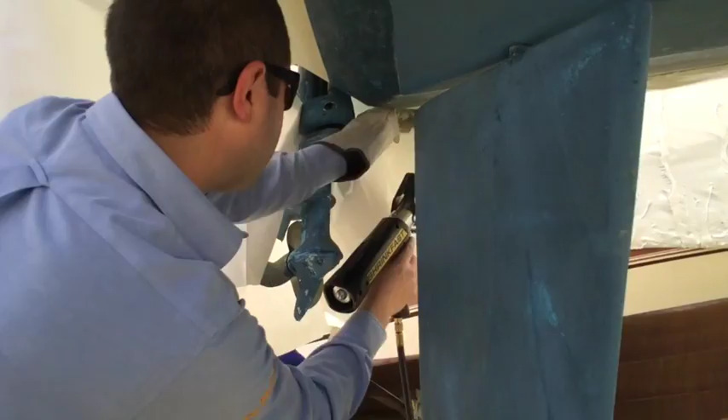Today, Dr. Shrink will be demonstrating how to successfully wrap a sailboat, mast up, for the winter storage season. The techniques used here can be applied when wrapping any single-masted sailboat.

We will begin with the strapping. The strapping will be secured to various locations on the sailboat to ensure proper pitch to shed unwanted snow during the winter storage season. Begin by securing the strapping to the mast and the forward pulpit.

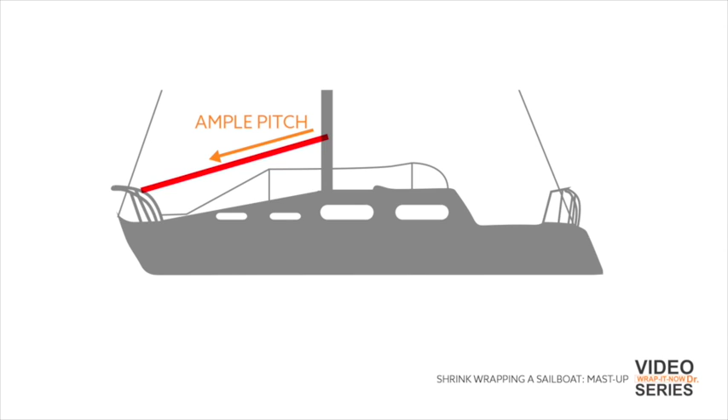We will start with the mast. When securing the strapping to the mast, ensure it is high enough to allow ample pitch to shed snow and ice. Tie your strap to the mast, leaving plenty of extra to secure to the forward pulpit strap. To secure the forward pulpit strap, we recommend making a V pattern with your strapping, securing to the strap on both port and starboard sides of the rail.

Your strapping from the mast and strapping from the pulpit will be connected using a buckle and strap tensioning tool.

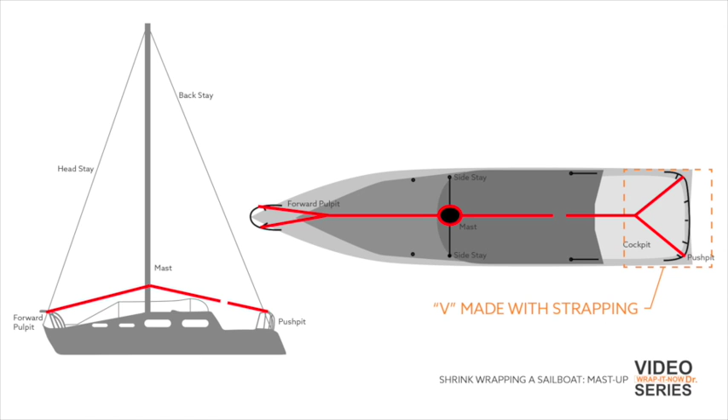The same concept applies to the strapping system for the pushpit rails. Secure a strap from the same location on the mast as you did to the forward section of the vessel, again leaving yourself plenty of strapping to connect to the pushpit strap. For the pushpit strapping, create a V pattern from the wide points on the starboard and port side of the pushpit rails and secure both straps together once again using a buckle and strap tensioning tool.

Here you will see the strap being tightened with a strap tensioning tool.

Just like the forward bow straps, knot off the excess strap and cut away any excess. At this time, you will also want to tape your buckles to ensure no hot spots or holes are created in your finished shrink wrap cover.

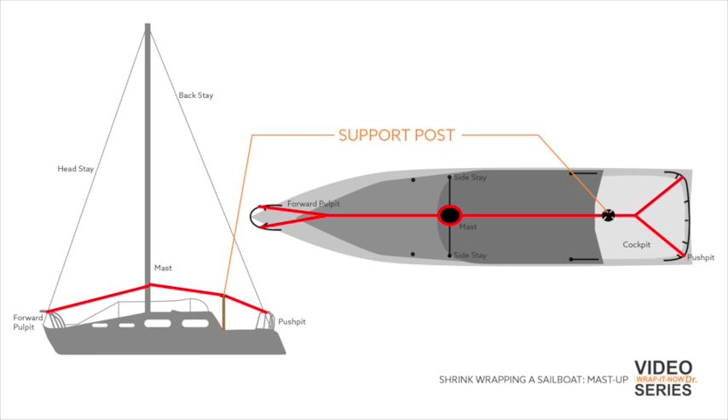For this application, we will also be installing a support post with end caps in the cockpit of the vessel for increased strapping stability. Measure your post like we have done here, and cut your 2x4 to size, and secure end caps to each end.

To ensure that your end cap is secure, run a line perpendicular from your existing strapping through the end cap around the hull of your vessel. Be sure to place your support post in the cockpit, so when wrapped around the hull, the strapping sits behind the keel.

Once this is completed, you will secure your strapping with a buckle and strap tensioning tool. Be sure to once again tape your buckle.

We will now move on to the perimeter band. To install a perimeter band, we will install straps from the cleats or rails with an open loop on the end. As you can see here, the loops will secure the perimeter band just above the waterline of the vessel.

You may secure your perimeter band as high or as low as you like, but if unsure, use the waterline as a guide, as this will ensure an even perimeter band around the entire vessel.

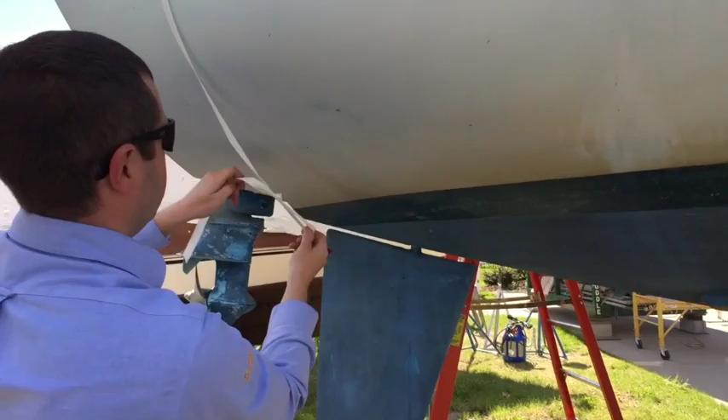Much like the installation of the perimeter band on other vessels, start at the rear and loop your band through each of the straps around the entire perimeter of your boat, ending at the stern.

Here you will use a buckle and a strap tensioning tool to secure your perimeter band. Be sure to use padding or protection against your hull when using the strap tensioning tool. Apply even tension to the strap to ensure that it is a snug fit against the hull. When you have tension in the strap, be sure to cut your excess strapping, tie off, and tape your buckle.

Now that your perimeter band is complete, your shrink wrap substructure is now finished. We will now measure for your shrink wrap cover.

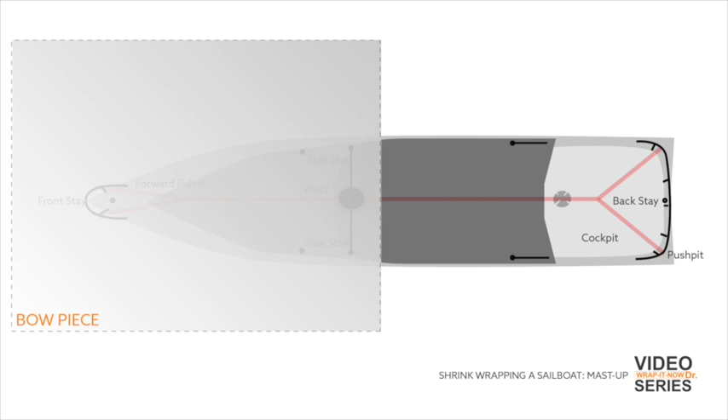We will have 2 sheets of film, one for the bow section to the mast, and one from the mast back to the stern. Here is how we will measure these sections.

For the bow section, we will first measure the length. We do this by measuring from the mast to the forward pulpit and down the bow to the perimeter band. We will add an additional 4 feet to this, 2 at the mast and 2 at the perimeter band, for additional film needed for our welds. This gives us our overall length.

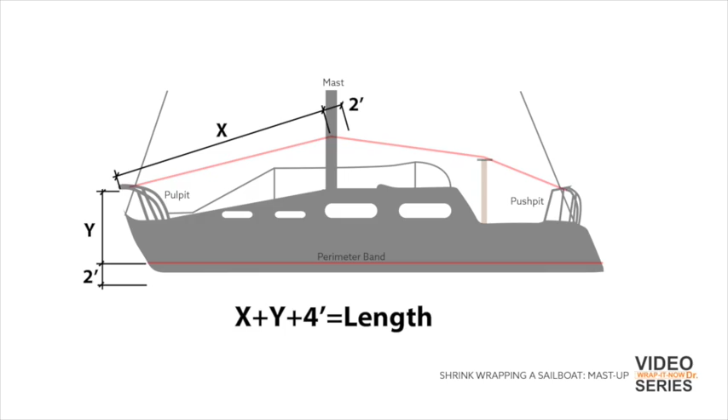We repeat this same concept for the stern film piece. For the length, we measure from the mast over the end cap to the pushpit rail. From here, we will measure down to the perimeter band and add 4 feet, 2 at the mast and 2 at the perimeter band, for additional film needed for our welds. This gives us our overall length.

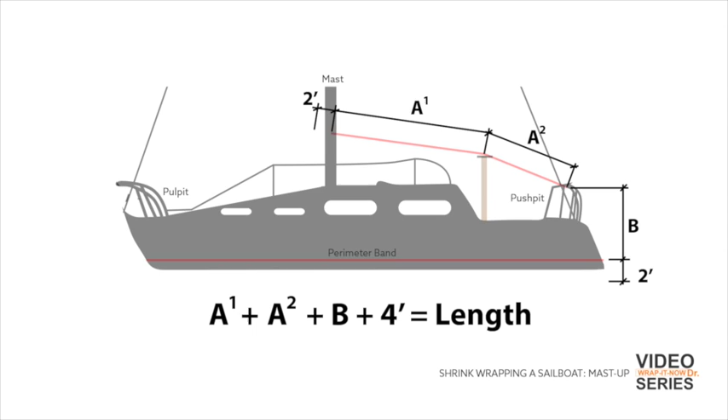We now need to measure for the width. We do this by measuring from the connection point of the strapping on the mast to the top of the lifeline, down to the perimeter band. We then add 1 foot to this measurement to ensure we have enough material for our weld. We double this for our overall width.

Now that we have the measurements of your film, we will cut the film to length. This will make it much easier to install from the elevated position of the vessel. Roll out your film in a clean and dry area to avoid debris on your film. Measure and cut with a film knife.

Once your 2 pieces have been cut, we will begin installing the film. We will begin by installing the bow piece. Unwrap your film from the deck of the vessel and find its center point. You will secure the film to the mast with tape. Be sure to leave about 2 feet of excess beyond the mast, which you will use for your weld piece

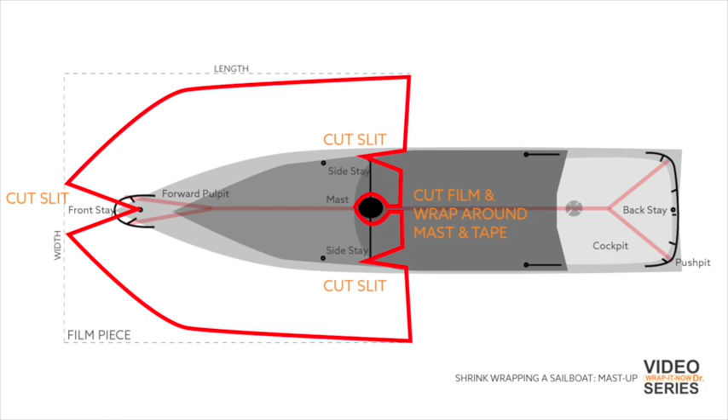to the stern. As you drape the bow, you will cut slits in the film around the front stay, side stays, and mast as illustrated here. You will do this to both port and starboard sides of the film. Once you have cut these slits and fitted the film centered over the bow, unfold the entire bow piece.

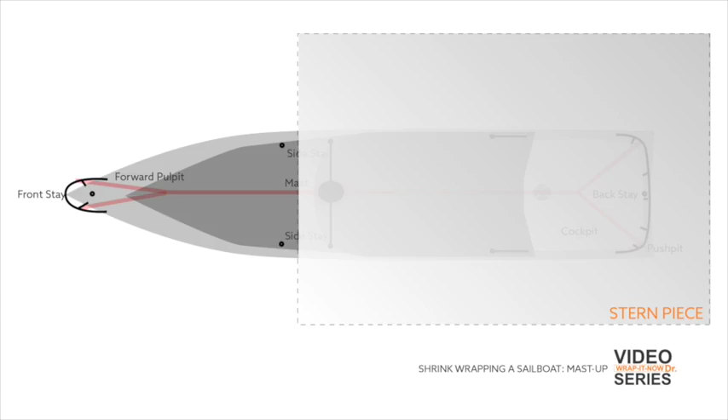You will now install the stern piece. Take your film onto the deck of the vessel, and much like the bow piece, find the center point. You will cut slits in the film around the back stay, side stays, and mast as illustrated here. Be sure to once again leave about 2 feet of excess for your weld to the bow piece.

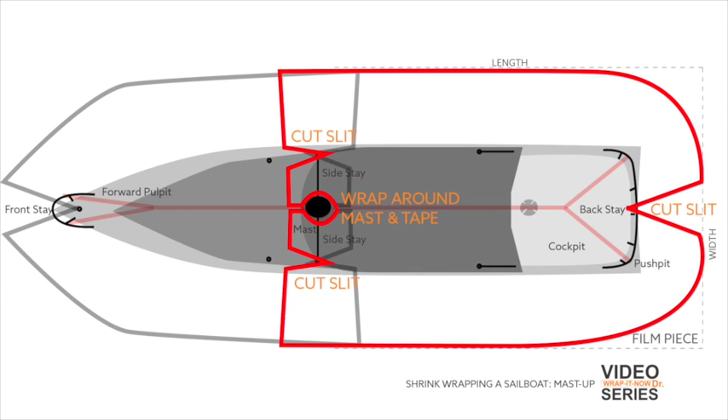Once you have found the center and taped your bow and stern pieces, you must weld the film around the mast, between the mast and the side stays, on both port and starboard sides of the boat, as this area will not be accessible once the entire vessel has been draped. You can see in this diagram the area to be welded before getting off deck.

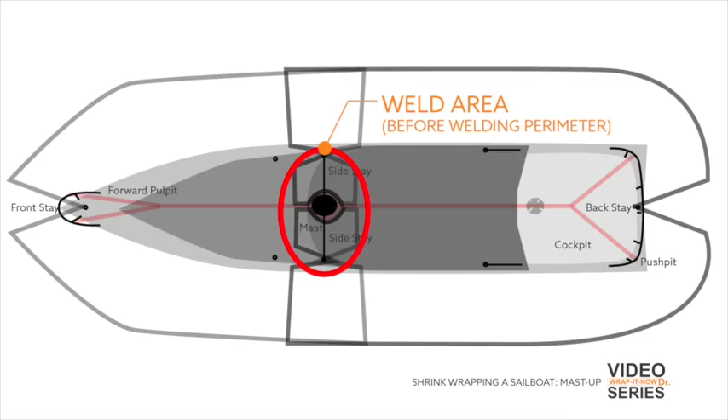Now that you have the entire vessel draped, you will tuck the film under the perimeter band to create your weld and also cut any excess film to conform with the lines of the vessel. Remember, you will need approximately 1 foot of film to tuck around the perimeter band for a secure weld that will last the entire storage season.

You will notice the entire perimeter has been tucked with the exception of the bow and stern section behind the transom. This will be overlapped and welded much like the center weld. Cut away any excess film, giving yourself approximately 1 to 2 feet of film to join together and weld in these areas.

Once all of your bow and stern sections have been welded, you may weld your film around the perimeter band. As you make your way around the boat, you may also weld the center section, joining the bow and stern film pieces.

Now that your welds have been completed, we will install belly bands to ensure your cover stays in place during the shrinking process. For this application, we have installed 2 bands, one on the bow side of the keel and one towards the stern.